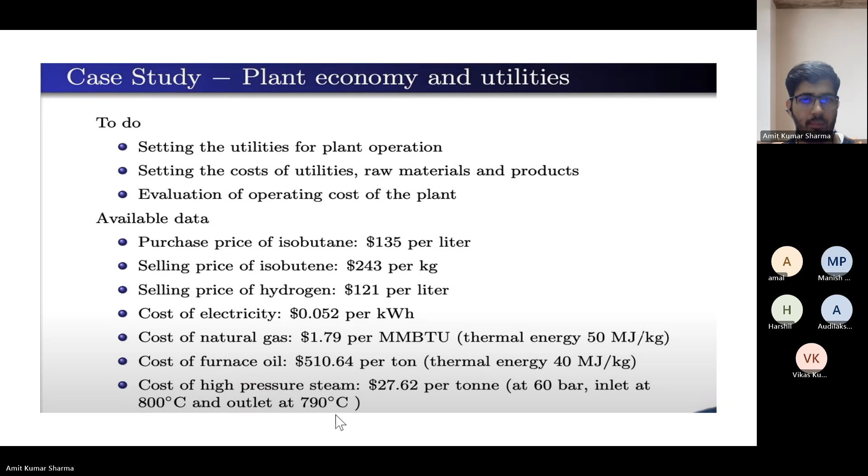So let's start with the assignment questions. Which among the following is not a standard utility item in Aspen Plus? The options are coal, electricity, steam, and wood. We have some standard utility items in Aspen that you can directly use. Which one is not standard and not available in Aspen Plus? Wood. Okay, so we have an answer: wood.

Anyone else? Coal is also not a standard utility. Okay, have you checked the Aspen software? Yeah, I'm checking. Okay, check.

Normally coal is listed. If we are making a flow sheet for a thermal power plant, then I think coal will be there. So in my opinion, I think coal should be there. Maybe the direct coal name is not mentioned, maybe in some other form, but I think coal should be there because coal is the main feedstock for a power plant.

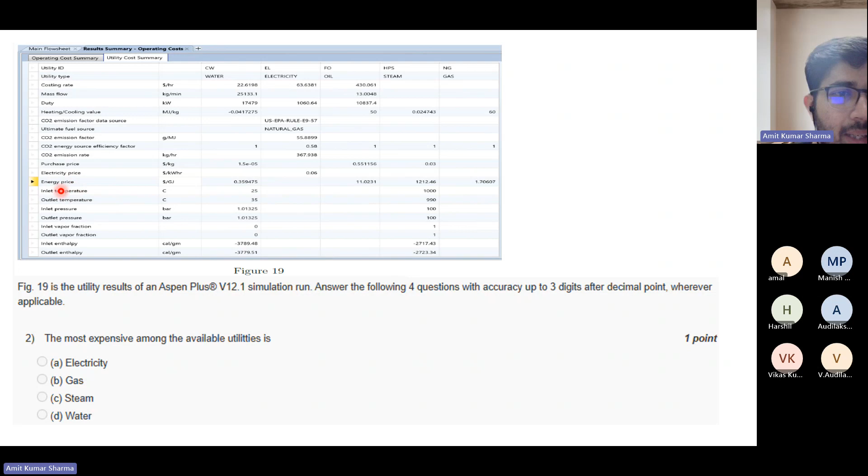So here you can see we have two prices, energy price and electricity price. The energy price for water is in dollars per gigajoule, and for electricity it's dollars per kWh. So electricity is only 0.06. This is 0.35. Oil is 11.02, steam is 1212.46, and gas is 1.76. So this is the parameter by which you can compare the expensive one or cheap one. This costing rate gives you the results for what you used in your system, and this is the amount you are spending to run your system for 1 hour—to fulfill your system's utility demand. But that's not the price for the utility; the price for the utility is these two values. So compare among these.

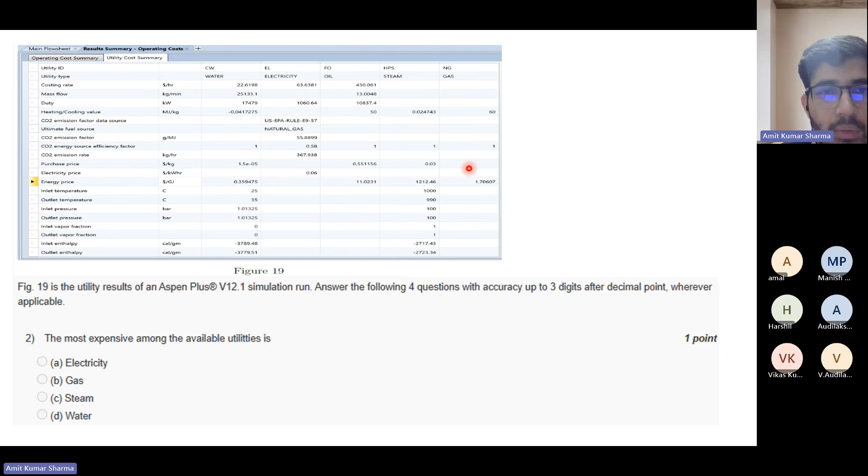So as you said, steam is the highest one, so the correct answer would be steam. Yes, steam. Is it clear?

Okay, if you have any doubt, let me know.

So which among the following utilities has not been used in the simulation? Electricity, oil, steam, and water. Electricity. The question is which among the following utilities has not been used in the simulation? So we have one answer, electricity. Anybody else?

Again, you need to check the parameter by which you can compare, and I think in the previous question we discussed about it. Try to correlate.

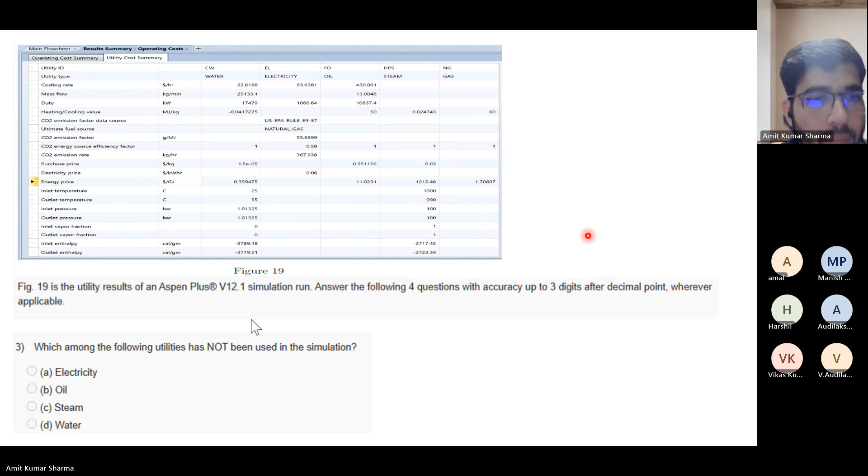Sir, steam or gas? Yes. So steam or gas is not used because, like as we discussed, so

this costing rate is representing the amount you spend for 1 hour run of your system. So you can see only we have three data. We have data for water, electricity, and oil. So basically, in our simulation, we have only used these three utilities. There is no data for steam and gas.

So these two have not been used. So check the options. Electricity is there, so electricity we have used, so option A is wrong. Then oil, we have data for oil also the costing rate, so it is also used. Then steam, yeah, we don't have any data for this, so it means that steam has not been used. Then water, so yes, water is also used.

So only option A, B, C, and D. Only option C, steam, has not been used in the simulation. And the gas also has not been used, but it is not in the option. So the option is

See, C, steam. Sir, we can also find the answer by looking at duty, right? Yeah, you can also check with the duty. You can also check with the mass flow.

So basically, these data, because if you don't have any mass flow, it means because mass flow, for electricity, there will be no mass flow, but the heat duty, it will be there. So heat duty is also an indicator, and the costing rate is also an indicator. And the other indicator, I think, only these two are the common indicator that will be there. Because if you are using any utility, then there will be some costing.

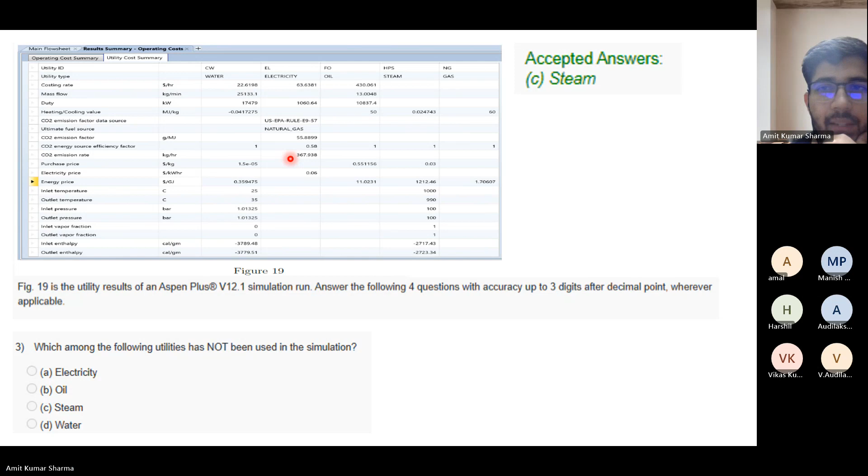The next question is, the utility water is released at what degree centigrade? 35. So we have an answer, 35. Yes, 35. Yes, so it's direct.

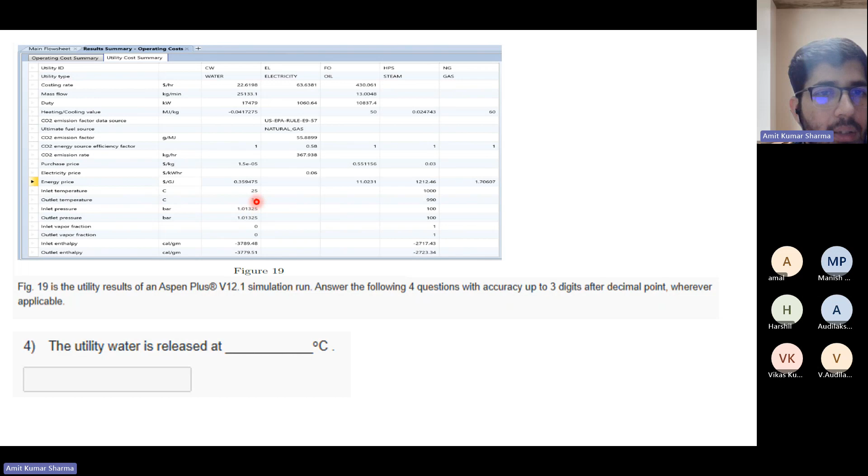Okay, so you can see the outlet temperature. The inlet and the outlet temperature you can see here, it's 25 and 35. So released means the outlet temperature. So the outlet temperature is 35. The answer is 35.

Now, the cost of utility water is - so what is the utility cost for water? 0.5 into 10 to the power minus 5, how much is it? 22.6, 22.62 dollars. We have one answer, $22.6 per hour, and I think there was another answer regarding 1.5 into 10 to the power minus 5, 0.5 into 10 to the power minus 5. Okay, what is your reasoning behind this answer?

Cost of utility water is... your voice is not clear, so please try to speak louder. Yes, sir, I'm confused between this because it is 1.5 into 10 to the power minus 5, which is the purchase price, and 22.6 is the cost incurred by us while using it in simulation.

Okay, so if you have a confusion, you should check the unit that the question asked. Then I think your confusion will be clear. So just check the unit. So they have asked in dollar per hour. Okay, sir, okay, got it.

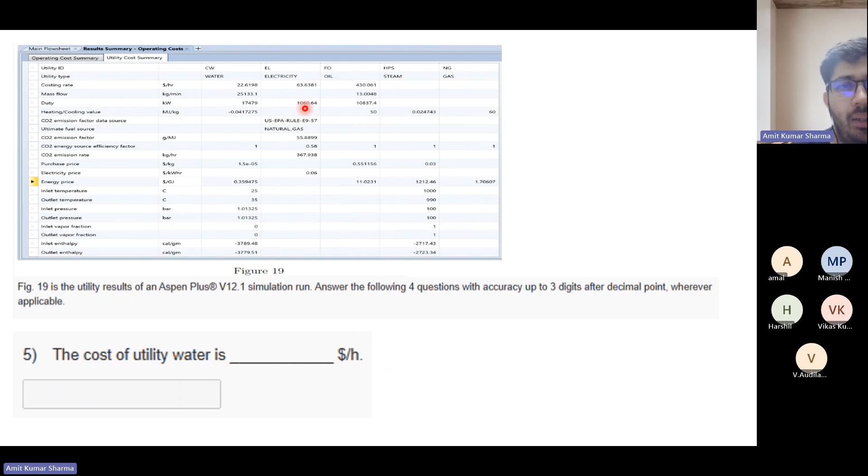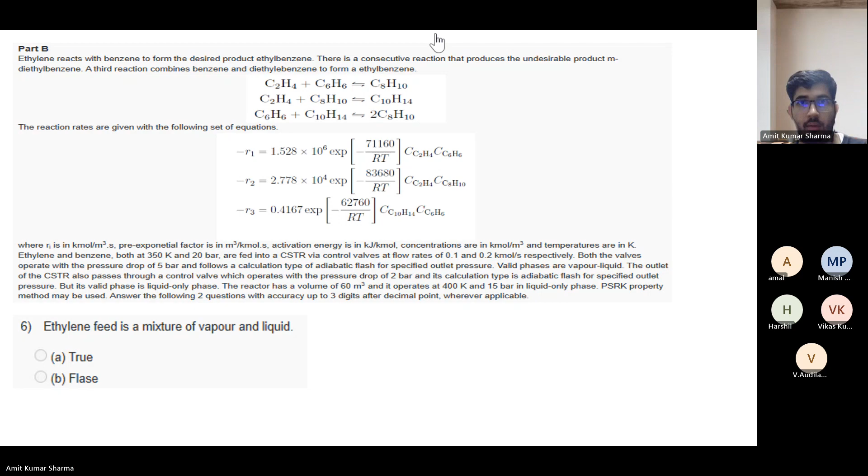The answer is false. Okay, so we have one answer, false. So let's start. Let me share my screen so we can solve it and check the answer.

So open your Aspen, then open a new simulation. Then here you define the component. So first the component, benzene, I think. Then we have ethylene. Then we have ethylbenzene.

Ethylbenzene you will not find directly, so you need to use the find command. Click on find and type the name here. It is ethylbenzene. So type the name, click find now. I think I did some spelling mistake.

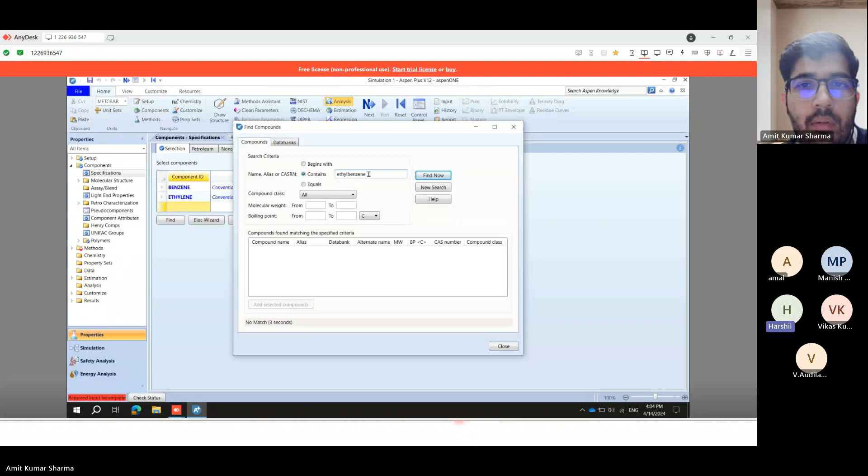So it's ETHYLENE, ethylene benzene... so ETHYL, only ethyl benzene. If you just put the chemical formula in the component ID, then also it will work - we can also do that, but I want to show you by typing the name. So the name is ethyl benzene, not ethylene benzene. So search for ethyl benzene, you will find some compounds here with their formula.

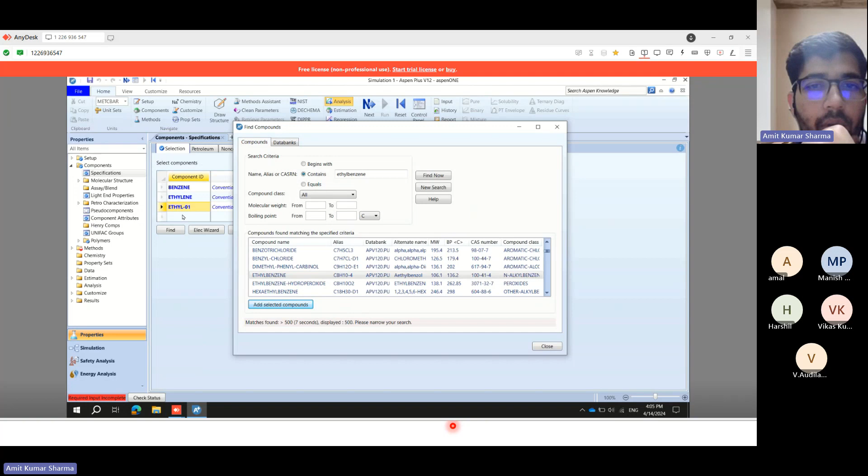So here you can see the ethyl benzene, it's C8H10. Click on add selected compound, so you can see it here. Or you can also type the formula C8H10, then you can also find it.

Then the second one is M-diethyl benzene. So the formula for this is C10H14. Okay, so now let's try with the formula C10H14.

So you can see you have something C10H14. So now find M. So yes, M-diethyl benzene. Okay, so it's C10H14.

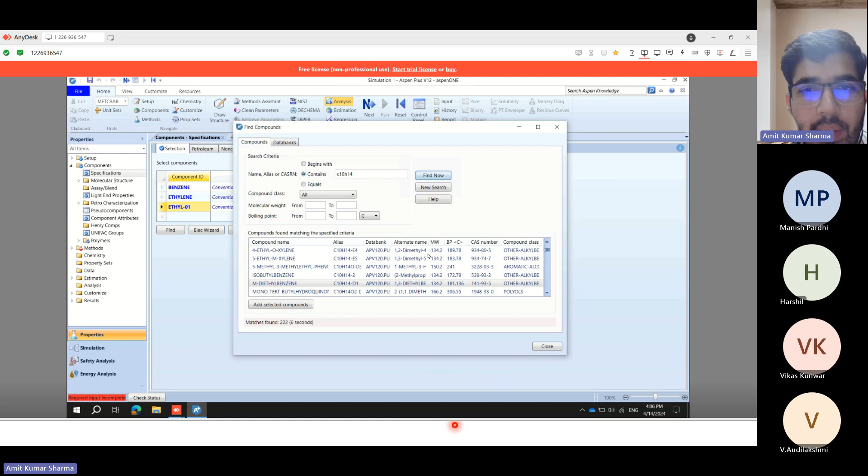So click on add. Then if you click on replace, your previous added will be replaced, but we want this one also, so click on add. So you can see it is added here. Now we have all four components. Now click on next.

Now here we define the method. So in the question, the PSRK property method may be used, so you need to define the property method as PSRK. Find the method, okay, so it should be PSRK. So here it is. Predictive Redlich-Kwong-Soave equation of state, PSRK. Then click next and run the property simulation. Okay, so it's done.

So the results are available. Now go to simulation environment. So here, if you read it, you can see the ethylene and benzene both at 350 Kelvin and 20 bar are fed into a CSTR via control valves at flow rates of 0.1 and 0.2.

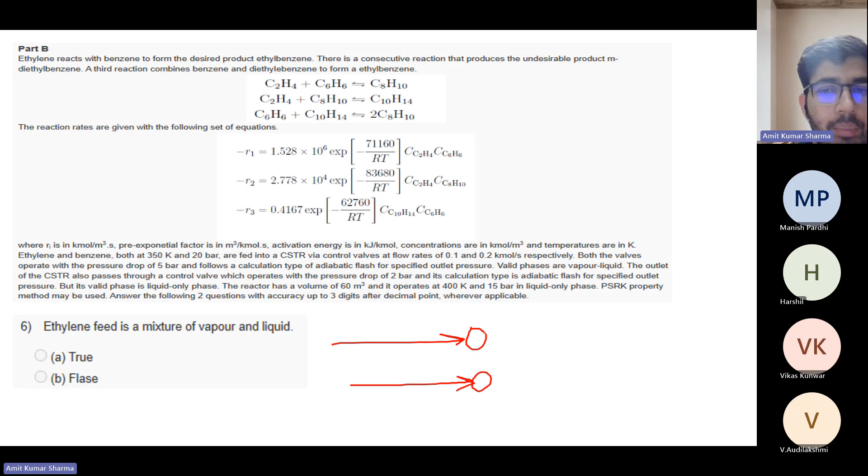So basically it means that there is one stream of ethylene and one stream of benzene. Then there will be a valve, okay, and from these valves you can control the flow, and these two are going into a CSTR reactor.

So first, because the question is ethylene feed is a mixture of vapor and liquid, if we only design up to here, I think we can check the stream results at this pressure and temperature. So do this.

So we have valves here, B1 and B2, okay, so we have two valves. Now connect the streams.

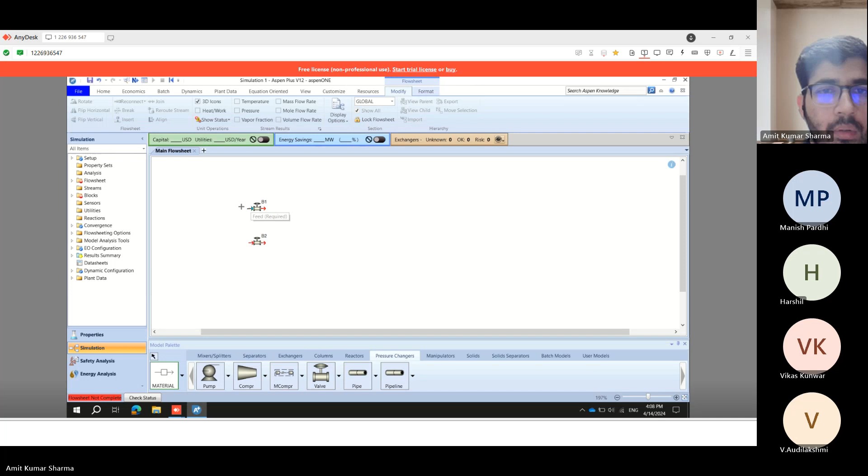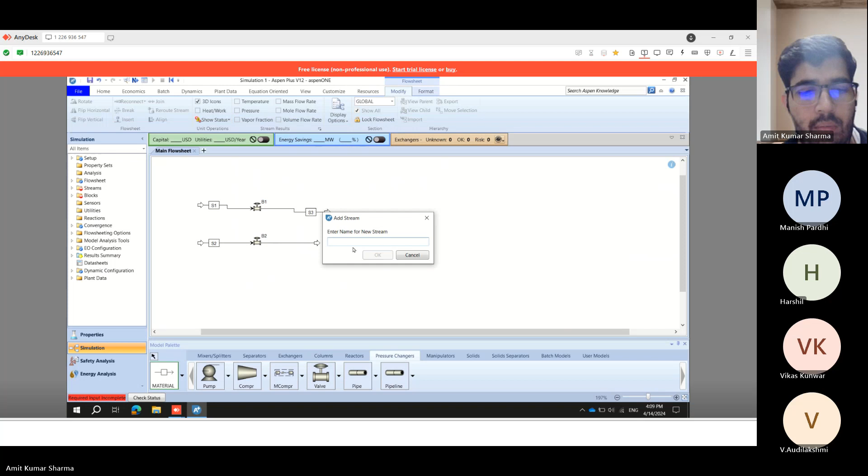So let's say stream S1, S2. Okay, so you've connected these. So click next. Now it's asking for the S1, so first stream is which one? What is the temperature?

77 degrees Celsius, what is the temperature for stream S1? Suppose the stream is benzene. 77 degrees Celsius. Your sound is not clear. Okay, so the 77 degree temperature. Your voice is very low, please check your mic. So you can see the temperature and pressure here.

Okay, so both ethylene and benzene are at 350 Kelvin and 20 bar. You can also enter in degree or you can also enter in Kelvin. So let's enter in Kelvin, 350 Kelvin and 20 bar.

So what is the flow rate? Flow rate is given here, like suppose first I am considering the ethylene, then the flow rate is 0.1 kilomole per second, so enter 0.1. Okay, so whenever you enter the flow rate, change the basis, like it's a molar flow rate, change it to mole, select the appropriate unit, then select here fraction. Mole fraction. So first we are selecting the ethylene, so the mole fraction of ethylene is 1.

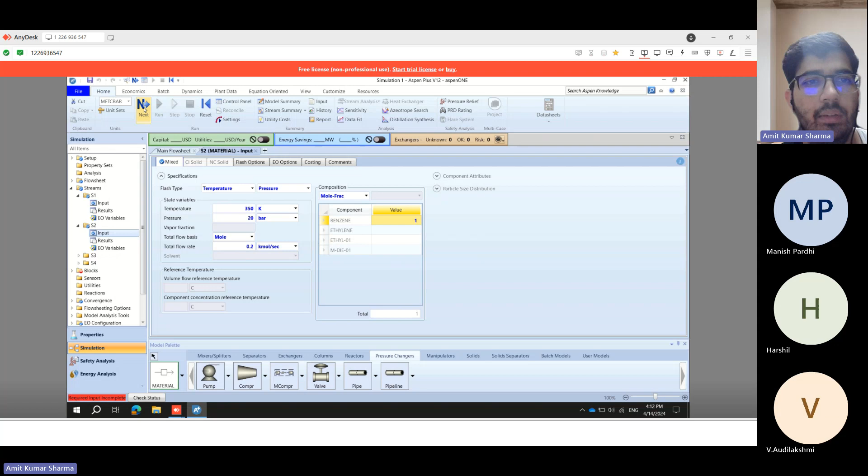Both are defined, click next. Now the valve B1 and B2, so valve for benzene and ethylene. So we have given that both the valves operate with a pressure drop of 5 bar, follows a calculation type of adiabatic flash for specified outlet pressure.

And the valid phases are vapor and liquid, so you've given some conditions, give this condition to the valves. Vapor liquid, okay, you've given the pressure drop, so how much is the pressure drop? 5 bar, so what should I enter here? 5, only 5, yes, so because it's directly written pressure drop, we will enter 5. Okay, so this one is defining the pressure drop.

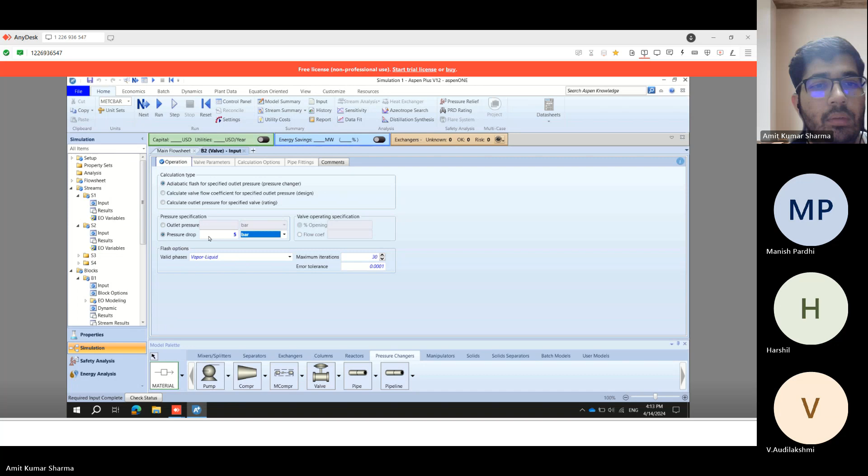And the type is adiabatic flash for specified outlet pressure, okay, it is given in the question. So select these three, you can see the inputs are okay, it's blue, and click next. Again for the second valve, same pressure drop. Okay, click next, so all required input is complete.

So now we can run the simulation, click OK. So we have results, now go to the stream results.

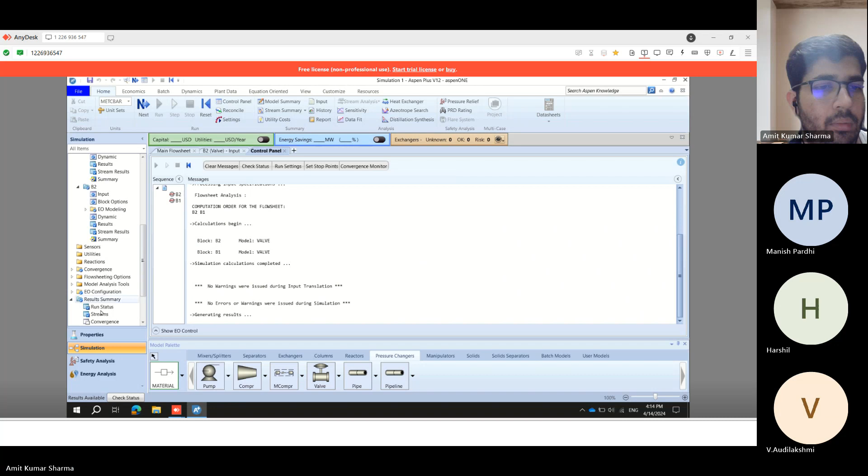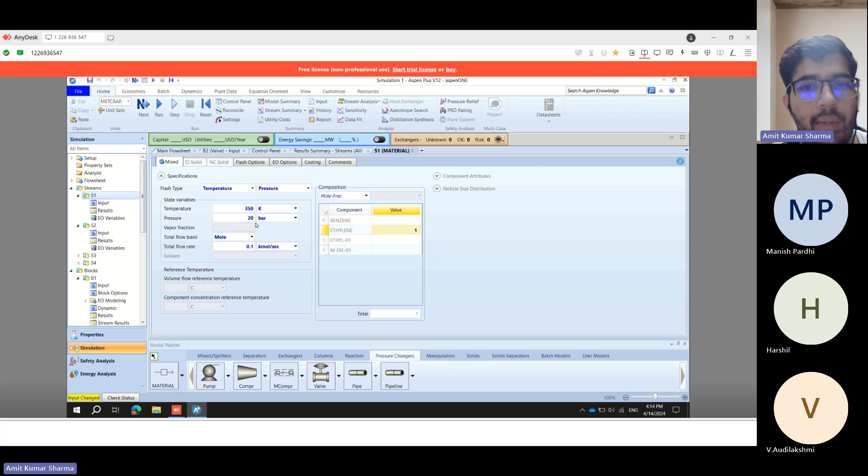So here we have streams S1, S2, S3, and S4. S1 is the benzene... sorry, let me check which one is S1. So S1 is this one, the ethylene, and S2 is the benzene.

So here you can check the phase. S1 is vapor phase and S2 is liquid phase. So ethylene is in vapor phase and benzene is in liquid phase.

So the question is about ethylene. The statement says ethylene feed is a mixture of vapor and liquid. But from Aspen, we can see the ethylene stream S1 is only in vapor phase. So the given statement is false. The correct answer is false. Any doubt?

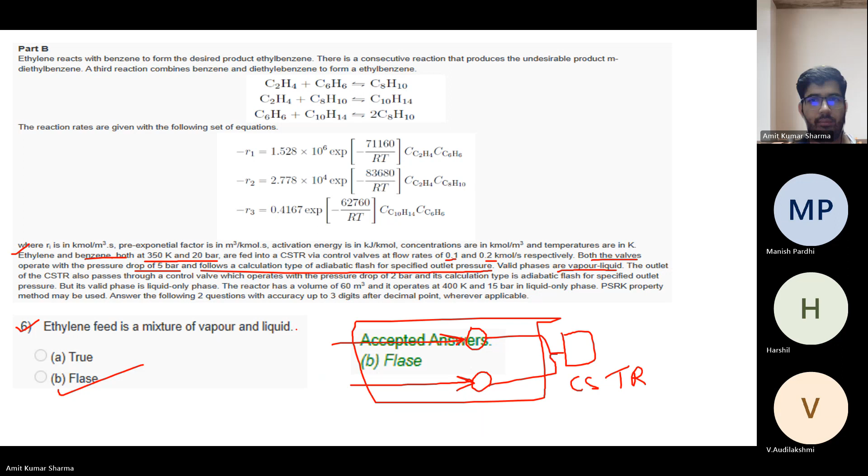Now the temperature of the reactor outlet is the next question. So now just add the CSTR reactor, define the reaction kinetics, and let me know the temperature of the reactor outlet in degrees centigrade.

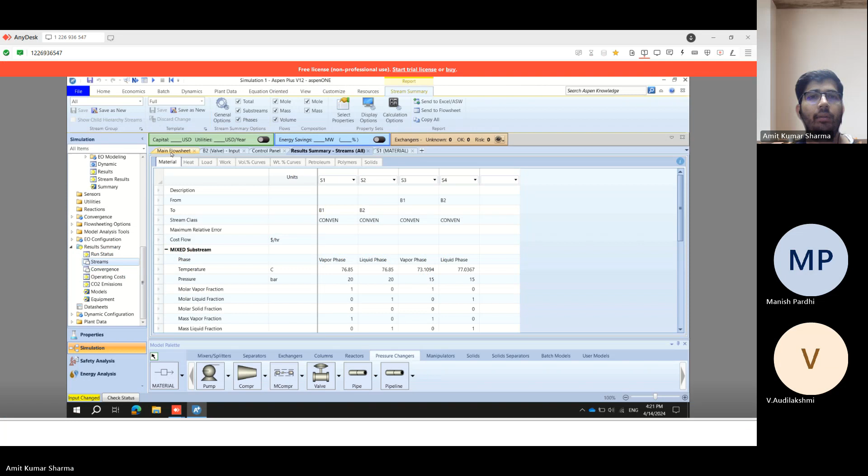Okay, so we can do this. Just go to the main flow sheet. Then we need to add a CSTR. So go to the reactors, you can find the CSTR, click on it. So we have added a CSTR. Now we need to connect these two streams to the inlet to the CSTR.

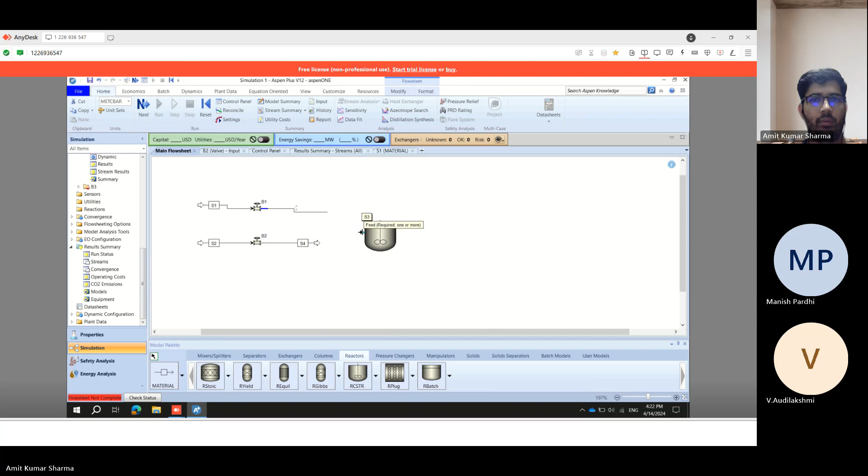So right click, then reconnect the destination. So it's here. Then for this one also, right click, then reconnect the destination. So it's here. So we have connected both streams.

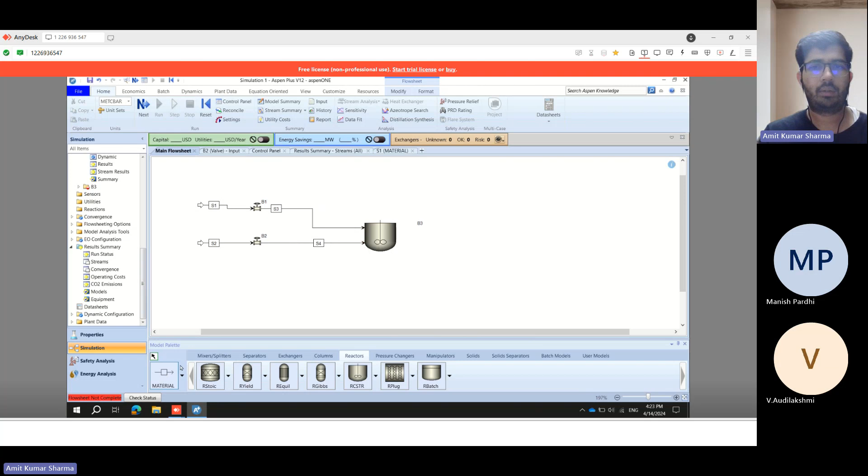Then there is the outlet stream, let's say it's stream S5. Now click on next. So click on next, then it will ask you about the CSTR input. So we have given some data for CSTR.

So the outlet of the CSTR also passes through a control valve, okay, which operates with a pressure drop of 2 bar, but it's liquid only phase. The reactor has a volume of 60 meter cube, operates at 400 Kelvin and 15 bar in liquid only phase. So we have given the pressure, how much? It's 15 bar and 400 Kelvin temperature.

So 15 bar is the pressure, 400 Kelvin is the temperature. The valid phase is liquid only phase, so change it to liquid only. Then the volume, it's 60 meter cube, so it's 60 cubic meter.

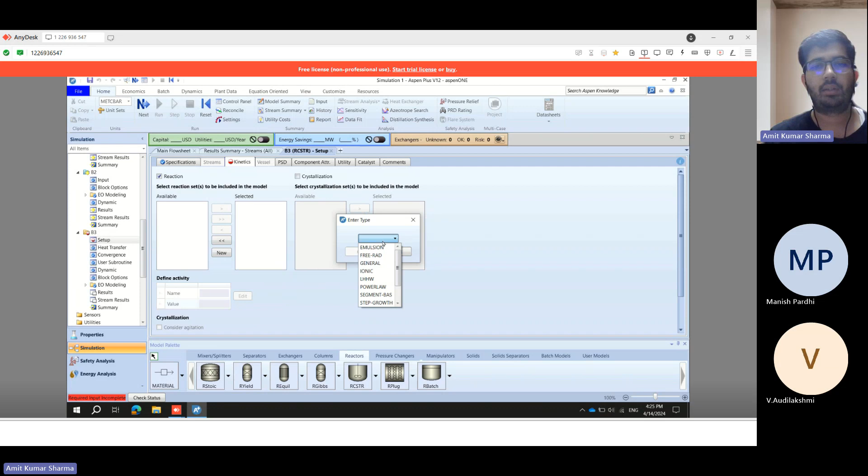Now we need to add the kinetics. So for kinetics, we need to add the reactions. Define a reaction R1, it is of type kinetic power law reactions. Click OK. Then we need to go to the reactions, then R1. Then here we need to define the reaction.

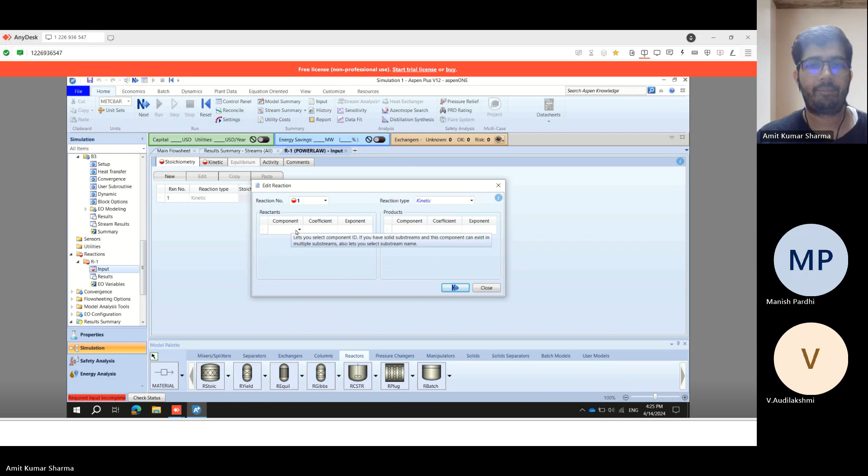So the first reaction is ethylene reacts with benzene. Ethylene, benzene, coefficient 1, 1. Then they are making ethyl benzene.

Then we need to add another reaction. So the second reaction is ethylene reacts with ethyl benzene, and they are making diethyl benzene. So ethylene is reacting with the ethyl benzene, and they are making diethyl benzene.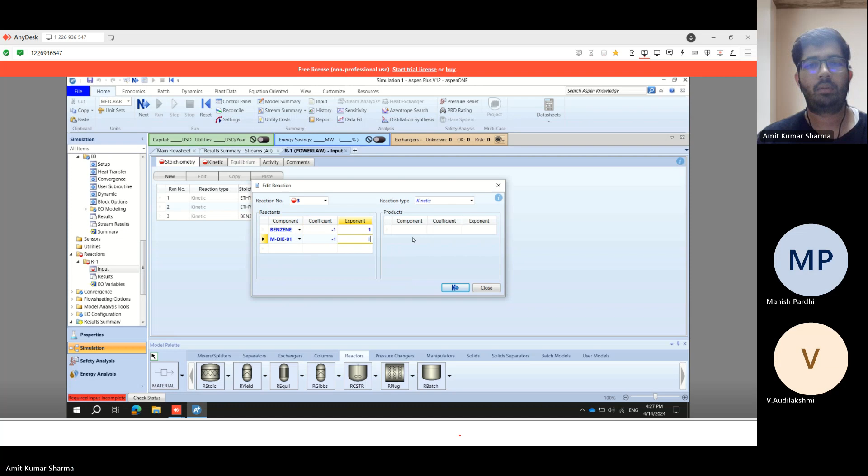Now the third reaction is benzene reacting with diethyl benzene, and they are making ethyl benzene, C8H10.

So we have defined the reactions. Now the kinetics. So you can see the equation here. We have not given any T0, there is no T0. The equation is like this.

If T0 is not specified, the kinetic factor is K T to the power n, E raised to the power minus E by RT. So compare these, the value of K will be this constant. The value of K for reaction 1 is 1.528 times 10 to the power 6.

Okay it's plus 6, plus, yeah thank you. And the n is 0 because you can see there is no T terms here, direct exponential. And the value of E, you can see we have given the unit here. The activation energy is in kilojoule per kilomole, so it is 71160. The negative sign is already here, so don't include the negative sign. So kilojoule per kilomole, it's 71160, right? Yes. So it's defined for reaction 1.

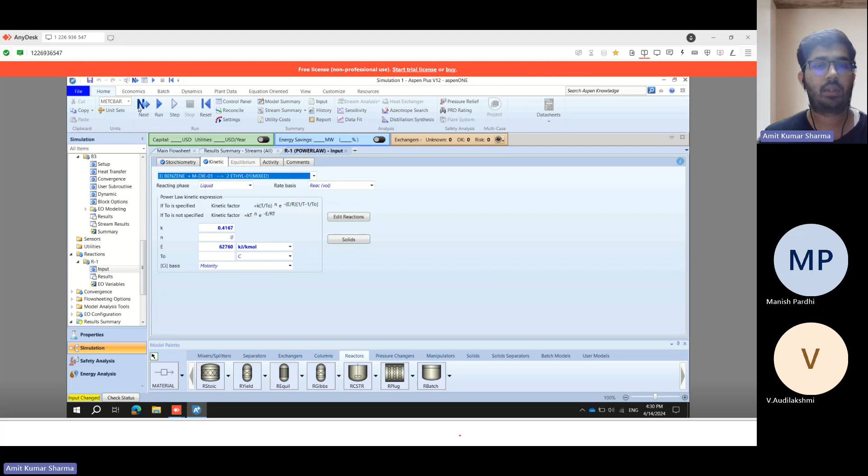So we have defined the reactions, you can see it's done. We don't need to define anything else. So just click next, run the simulation. So results are available, go to the result summary.

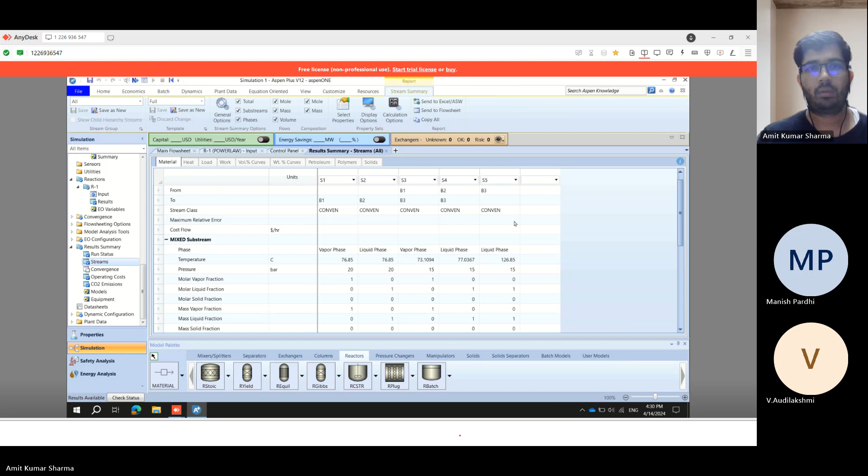Okay, so we need to find the temperature of the reactor outlet. If we check our flow sheet, the reactor outlet is connected to stream S5. The temperature of S5 will be the temperature of the reactor outlet.

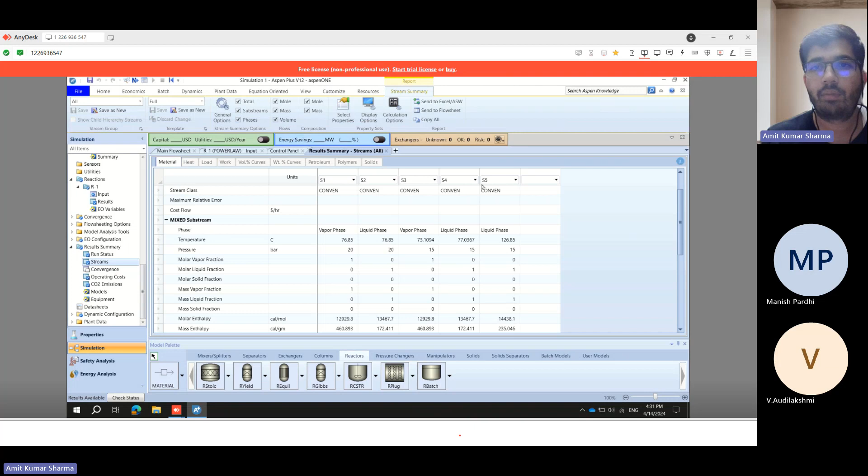Stream result, the temperature of S5 is, you can see here, 126.85. And in the liquid phase, this is the temperature. So the answer should be 126.85. Is everyone getting the same answer?

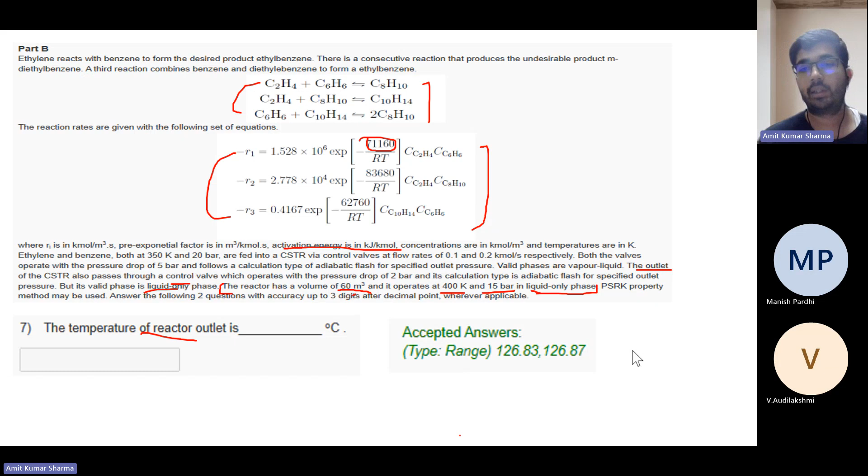Yes. Okay, nice. So let's see the answer. The answer is 126.83 to 126.87. So our answer is correct.

Okay, let's move. Is there any doubt? No, sir. Okay.

Now we need to convert the simulation into pressure-driven dynamic mode. Choose a vertical CSTR of length 10 meters with a flat head. It operates on constant heat duty. The initial liquid volume fraction is 0.864. It models equipment heat capacity with mass 6800 kg and specific heat capacity 500 joule per kg Kelvin. It includes a temperature controller. Save the Aspen Dynamics file and open it. Answer the following questions.

So there is one point. If you read the previous question carefully, you need to connect a control valve in the line after the CSTR. So before going to the dynamic simulation, just complete the simulation of the previous question first, then do the dynamic part.

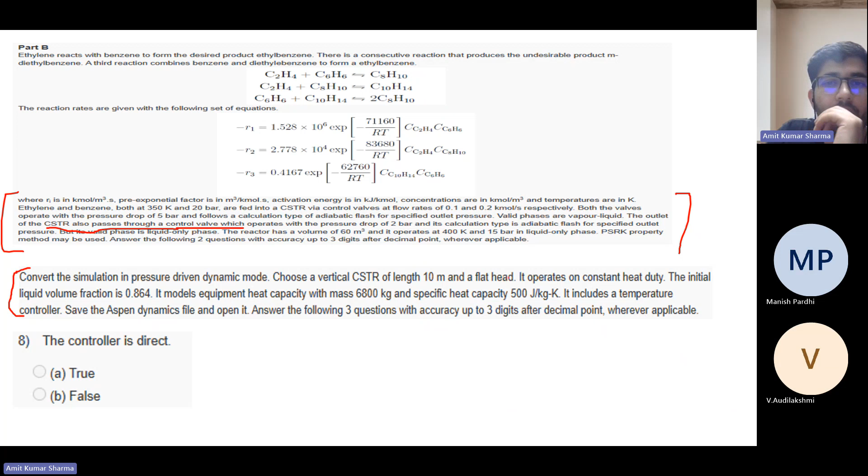Okay, so if you both are not trying, then I think we can start the solution. So first, let's complete the previous one.

So we have mentioned that the CSTR also passes through a control valve, which operates with a pressure drop of 2 bar, and its calculation type is adiabatic flash for specified outlet pressure. So just do that.

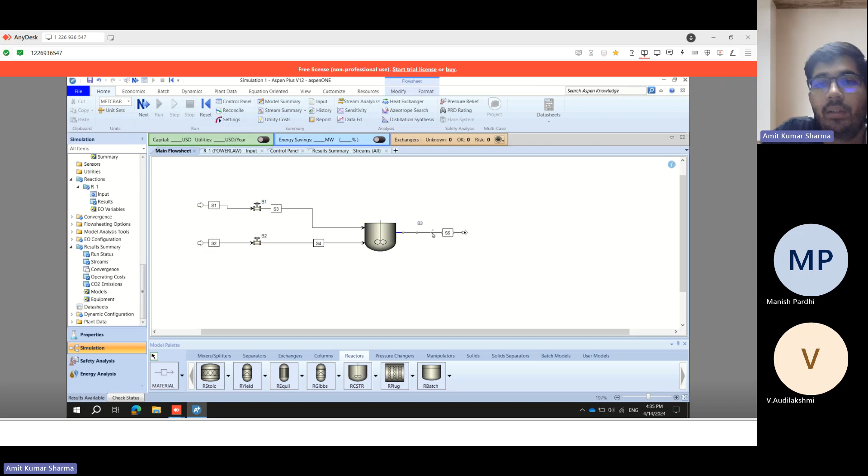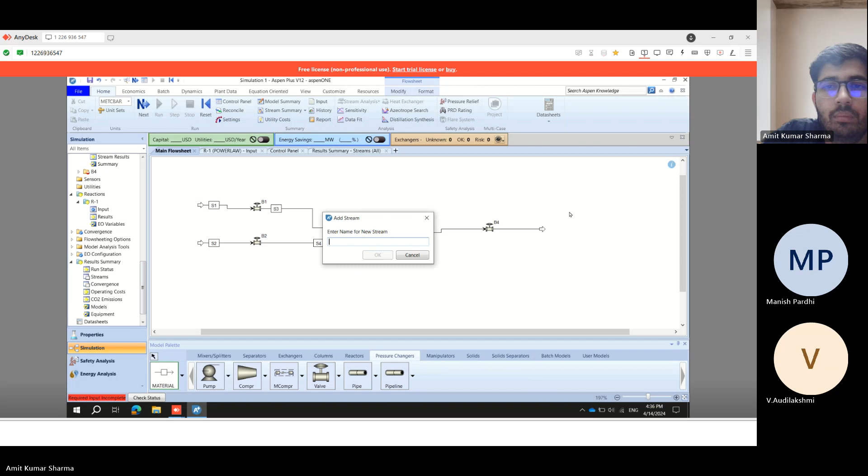So we need to connect again a control valve here. So reconnect this stream. Let's say it is stream S6. So we have connected this. Now click on next.

So it's asking for the valve B4 input. So we have given the pressure drop of 2 bar, adiabatic flash, and the valid phase is liquid only. So valid phase liquid only, pressure drop 2 bar, and adiabatic flash for specified outlet pressure. Click on next. So everything is okay. Now click OK. So your simulation is completed.

Now we need to convert it to dynamic mode. For more info regarding this dynamic mode, you should refer to the class notes and class video, where the professor briefly discussed Aspen Dynamics. It's a totally different software, a part of Aspen. So like we are working with Aspen Plus, but it's separate. Aspen Dynamics is a different part of Aspen, with so many features, so you need to understand it thoroughly and may need separate classes. Here we just discuss it very briefly, so you can refer the class notes, and if you are more interested, you can take another course for Aspen Dynamics.

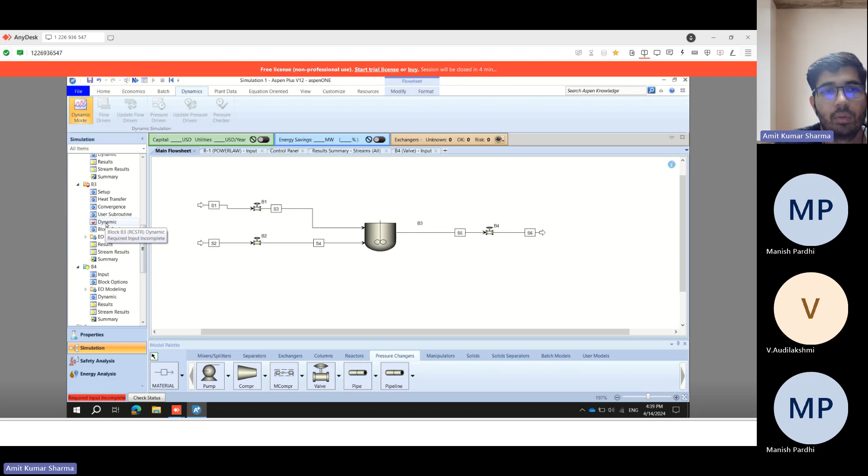So if you see here, this block is asking for some dynamic input. There is a new option to enter the input for block B3 in dynamic mode. Click on this, and it will ask for some input. So you need to fill these inputs. We have given: choose a vertical CSTR, length 10 meters, flat head.

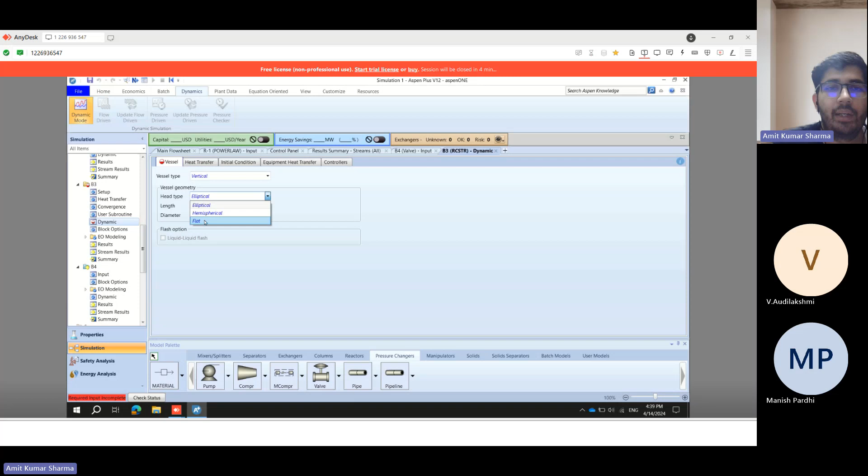So vertical type, head type is flat head, length 10 meter. Then it operates at constant heat duty. So the heat transfer is constant heat duty.

Then we have given the initial condition, the initial condition liquid volume fraction 0.864. So enter this 0.864.

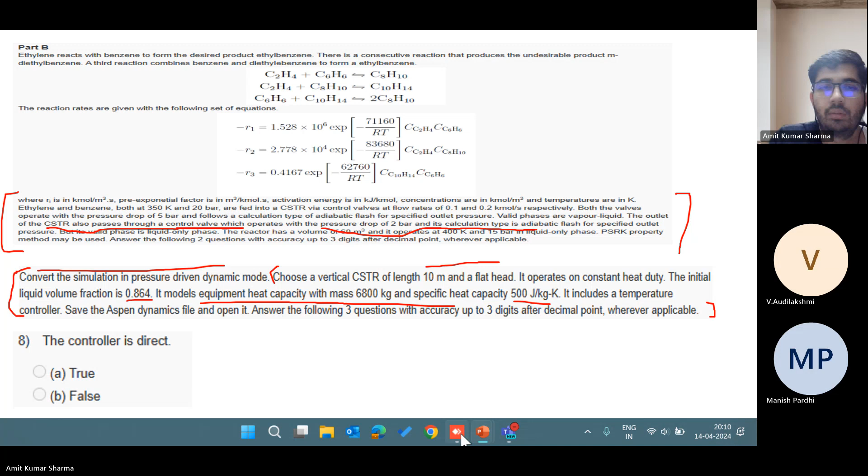Then we have given it models equipment heat capacity with mass specific heat capacity. So mass is 6800 kg. So model equipment heat capacity, the mass is 6800 kg. You've given the heat capacity of 500 joule per kg Kelvin. So it's joule per kg Kelvin and it's 500.

Then you have given it includes a temperature controller. So there's a temperature controller also. Click on the controller. You need to select only the temperature controller. Include temperature controller. So now we have given all the given inputs into this dynamic mode.

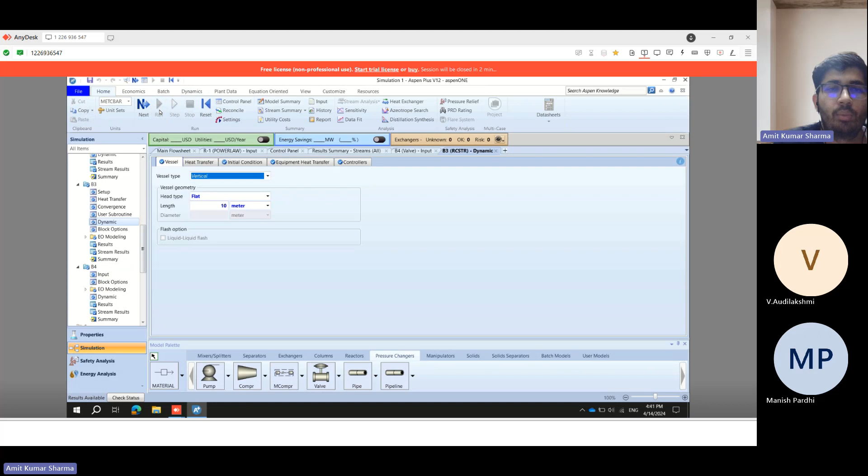So now it's ready to run. Click on run. Now simulation is complete. Simulation has run.

Now if you go to dynamics, you can see these values. You can click on it. The dynamic mode can be done by two ways, pressure driven and flow driven. It will be regarding the pressure driven, so click on the pressure driven.

So when you click on the pressure driven, it will ask you to save, the save as type. It will be an Aspen Dynamics file. As of now, we are working with Aspen Plus, so the file version is the document file APWZ. So first you should save this file.

So save as, it's a compound file, so it is APWZ. Let's say CSTR, save it. So now it's cstr.apwz file.

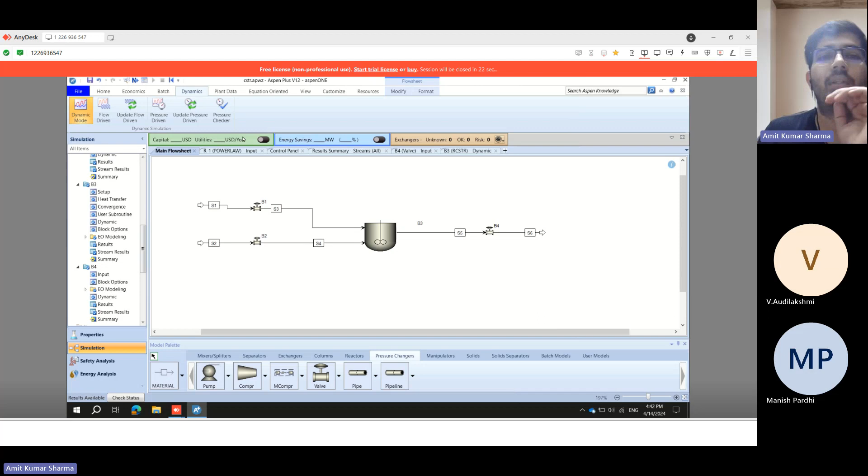When you click on the pressure driven, then it will again save in .dynf file. So rename it with dynamics. Suppose if anything happens, then you can open the previous file and start from this point. Switch to dynamics, then click on save.

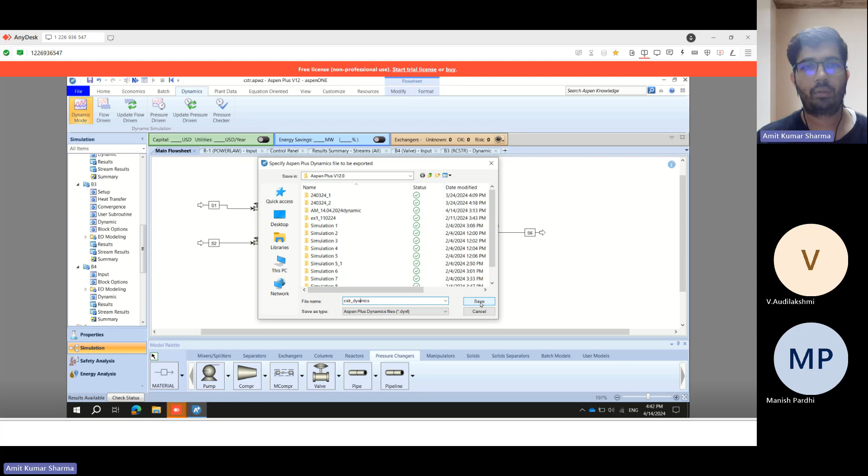Click on save button. It will give you some error. Ignore these errors and it will open a new Aspen Dynamics file.

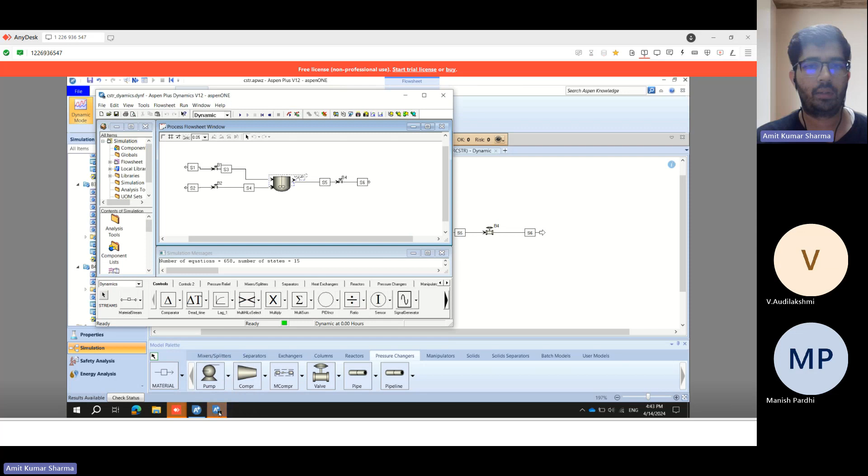You can see there is a pop-up. So close this one and open this one. This is the Aspen Dynamics. So now you are in Aspen Dynamics, no longer in Aspen Plus. This is the Aspen Dynamics software. You can explore this.

If you see carefully, this is our model, but you can see here there is another controller, B3TC. So there is some kind of temperature controller here. It is taking some input feedback and controlling the temperature of this CSTR. So it's a dynamic type of control.

You can do so many things, you can read the manual and take some YouTube help. Now what is the question? The question is: the controller is direct, true or false? So if you see here, we have a controller, this one. We need to check if it is direct or reverse.

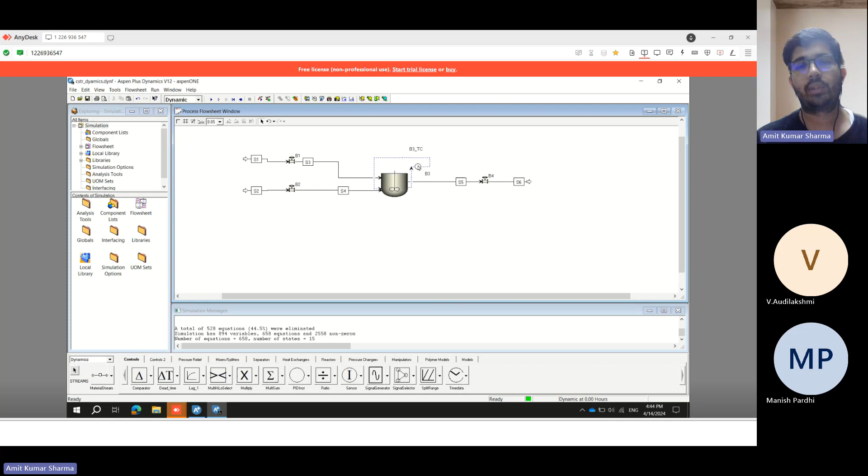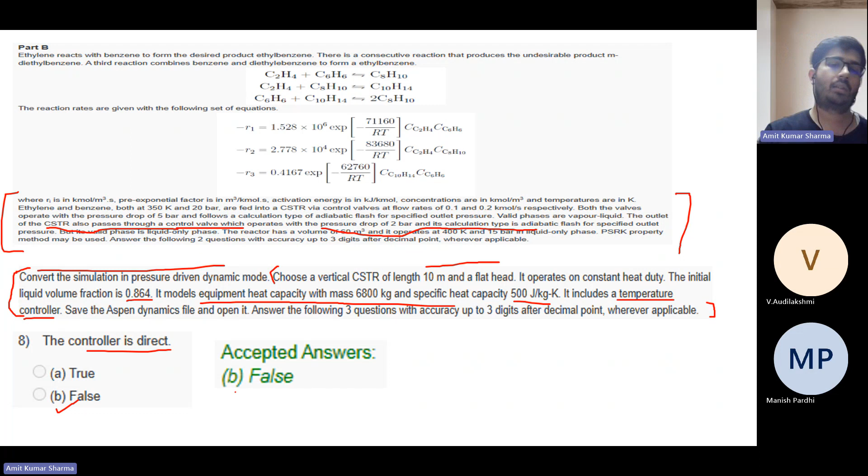If you click on it, you can see the option like set point, the process variable, and the output. If you click on configure, you can see the condition of the controller. You can see the controller action is reverse. So the controller is direct - is it? It is reverse, so it is false. The correct answer is false, the controller is reverse. For more detail regarding this Aspen Dynamics, please refer to class notes.

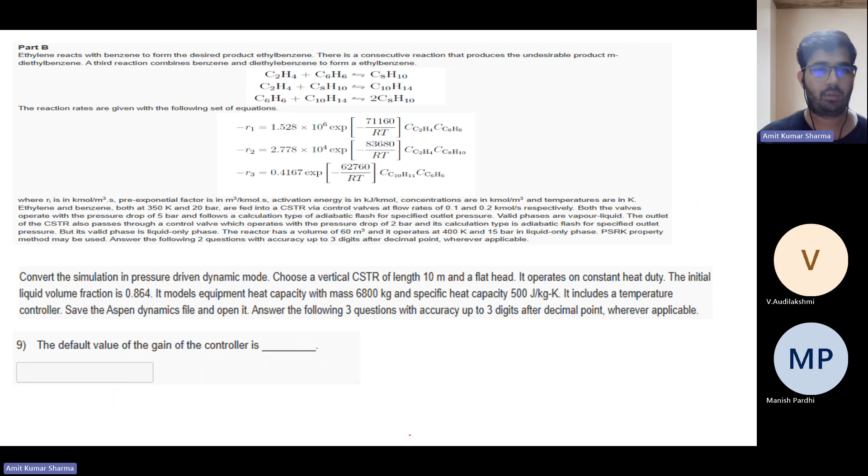Now the next question is the default value of the gain of the controller. So there is a value of gain of controller, what is the default value? If you again go to this window, you can see the gain. It is 5, so the default value is 5. The answer is 5.

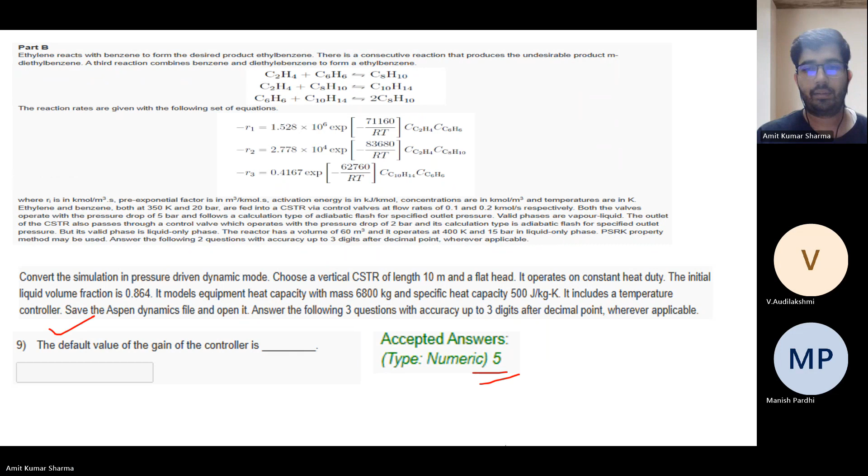So if you see the things, this is the way we can control the things. If you click on this run button, it will run some steps.

So you can see the set point is 126.85, and this variable was the varying PV. So it's trying to reach the same value, and now you can see they both are the same. After 2 hours, the steady state is achieved.

So you can see here, initially it was unsteady state. After 2 hours, you can see the steady state is achieved. So here you can change the set point and it will try to achieve this condition. Just stop it.

And suppose if I change the set point to 130, and if I run it again, so now see this one is changing. So it is changing the parameter, trying to achieve the set point of 130. So it's achieved 130.

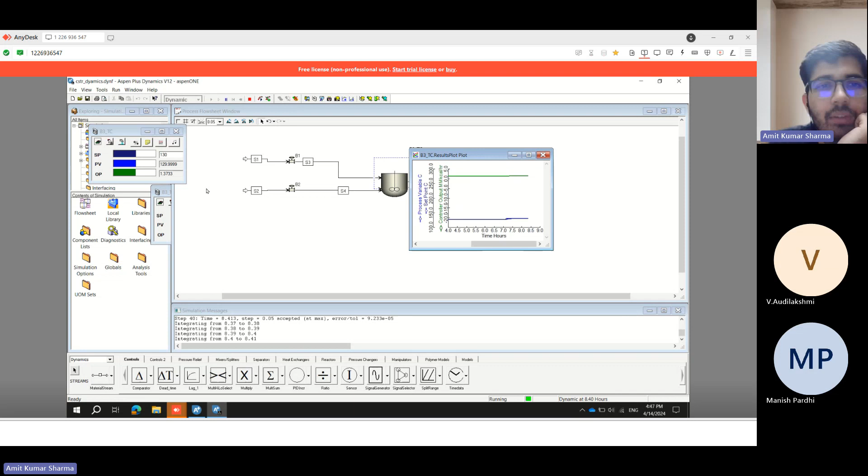So it is changing this output variable, and the unit is GJ per hour. Basically, it is changing the heat duty of the CSTR to achieve this set variable. So you can find the time, and after that there is a steady state. So this is Aspen Dynamics. You can explore more about it. Okay, let me stop it.

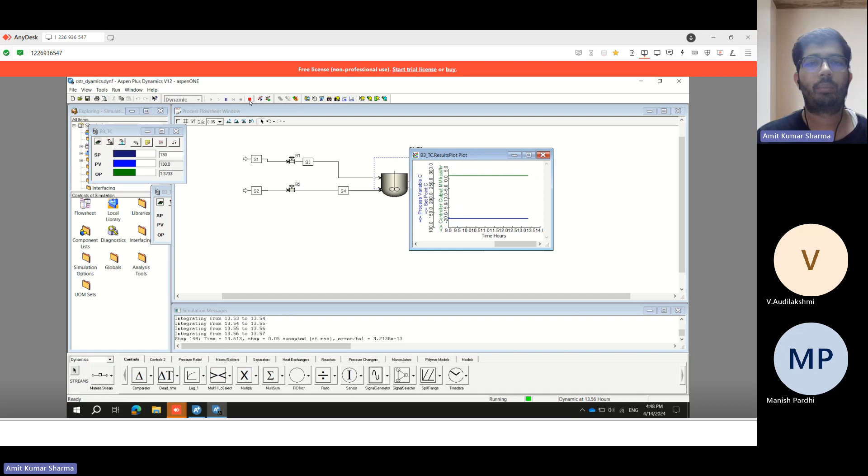So now the next question is, which among these is not an option for creating a new utility? LP steam, hot oil, methane, and cooling water. Which among these is not an option for creating a new utility?

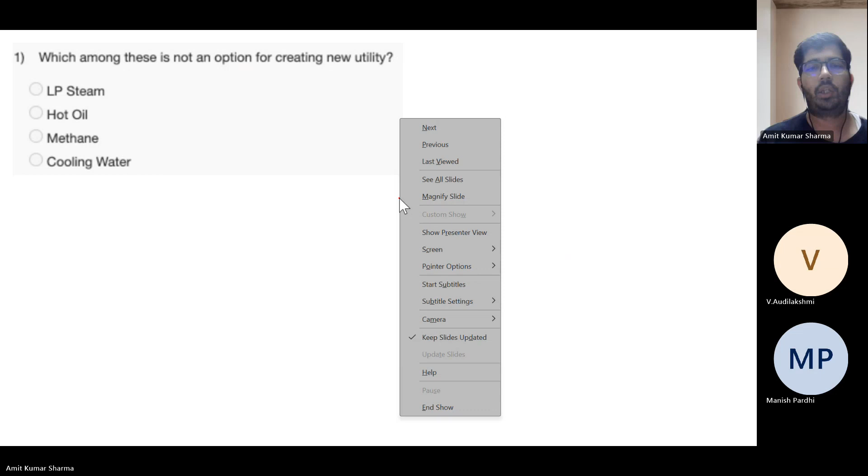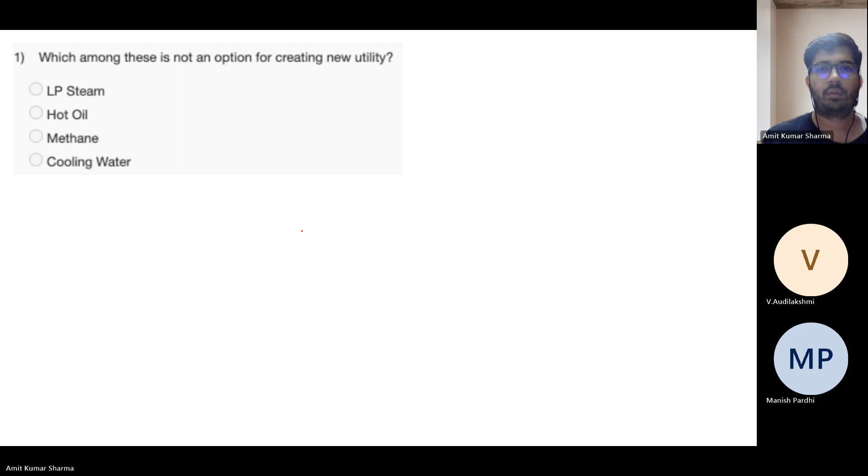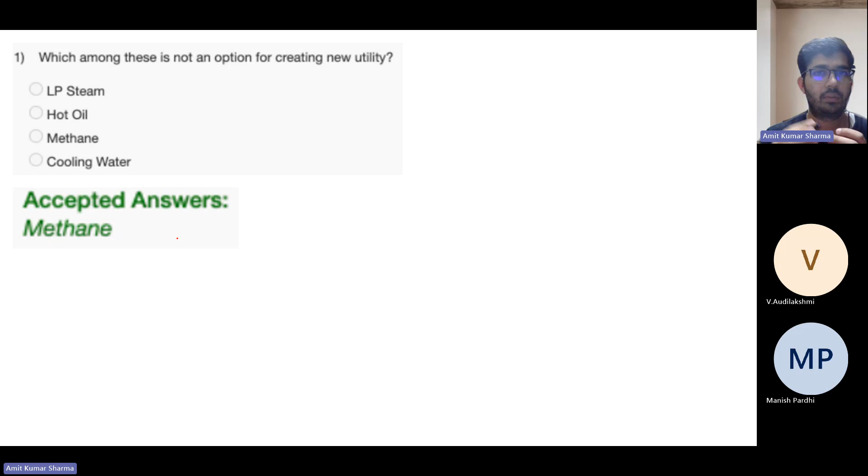Methane. Sorry, methane. Okay, we have one answer, methane. Yeah, so the answer is methane. So for a new utility, we cannot create one using methane. LP steam, hot oil, and cooling water, we can create a new utility.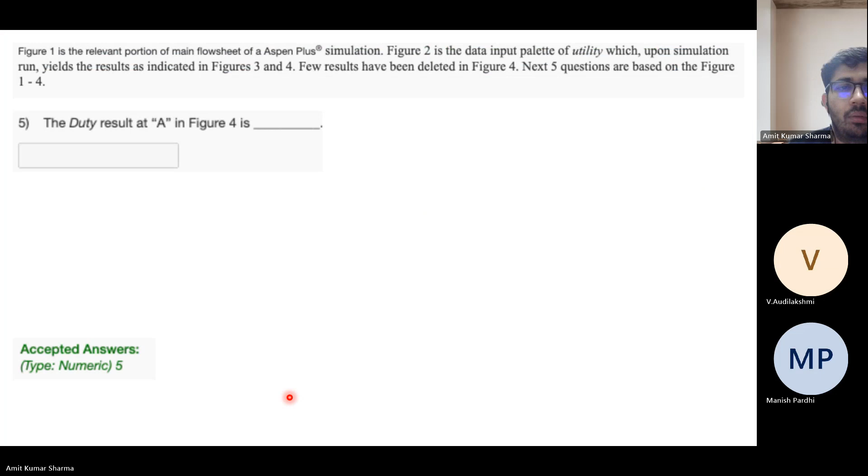Of B1. Please repeat your answer. 5 kilowatt, 5 kilowatt, B3. Okay, yeah, it seems correct, because you can see the heater result, the heat duty is 5 kilowatt. It means that we need the utility for 5 kilowatt, so the B3 heater duty is 5 kilowatt. Answer is 5 kilowatt.

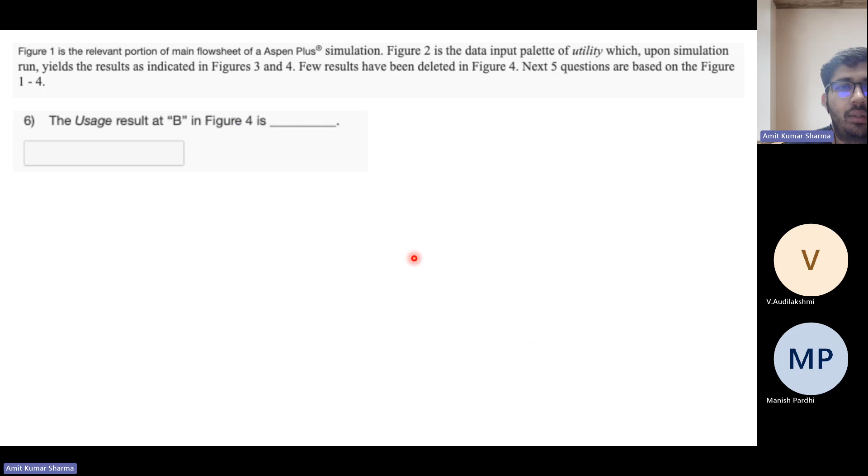The usage result at B in figure 4. The usage result at B in figure 4. So the usage, what is the value for this?

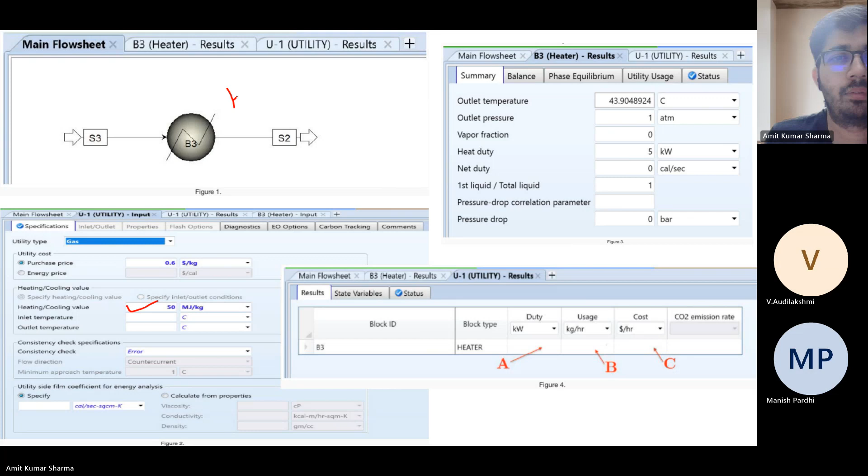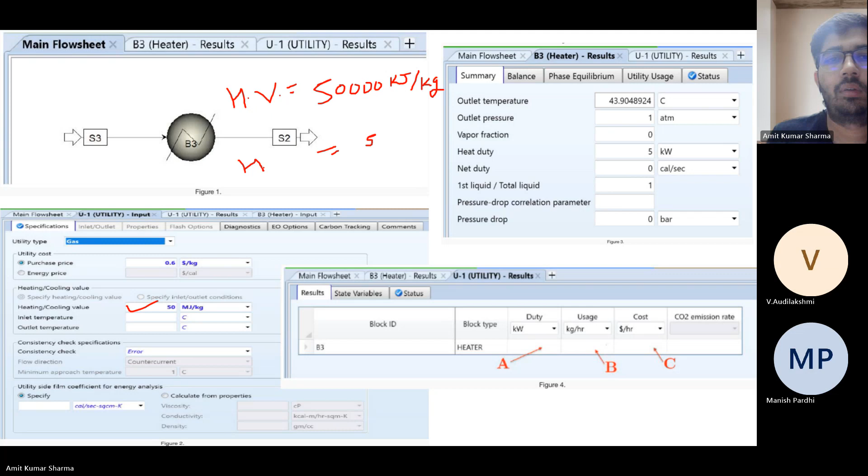So you have given the heating value 50 megajoule. Okay, so let's say heating value, so it's 50,000 kilojoule per kg. Okay. You have heat duty 5 kilowatt. So you can say heat duty is 5 kilowatts, so 5 kilojoule per second. So to maintain this 5 kilojoule per second, you need to use this gas.

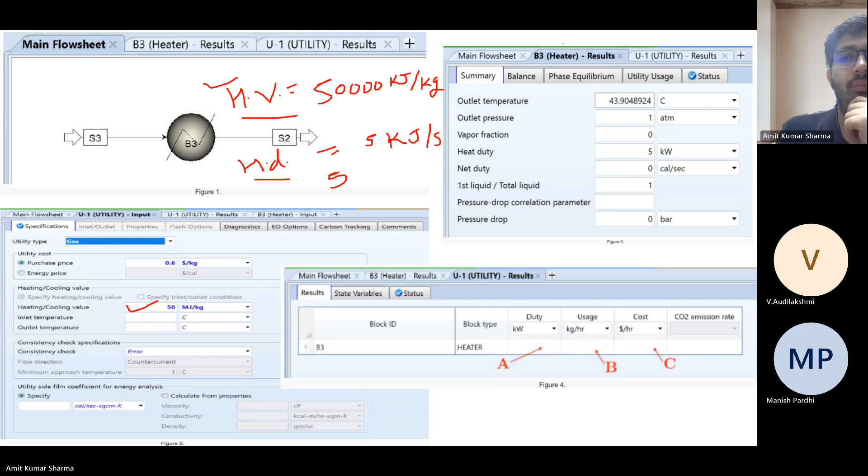So you can just divide this and you can find what should be the flow rate of this gas to maintain this heat duty. So just divide it. So 5 upon 50,000. It will give you kilojoule per second, okay, multiplied by kg per kilojoule. Okay, so this kilo will cancel out. So your answer will be in kg per second.

But we have asked kg per hour, then you need to convert the second into hour. So multiply with 3600. Okay, so 1 hour is 3600 seconds. One hour. So the second will cancel out. Okay. So it will be kg per hour. Okay.

So the answer will be, I think, how much the answer is? So it's 0.36, 0.36. Okay, so this is the way you will calculate the usage results. So basically, you have to calculate the flow of the gas required to maintain that heat duty.

Now the cost result at C. So as you are using some utility, then you need to find the cost. So what will be the cost dollar per hour for this heat duty?

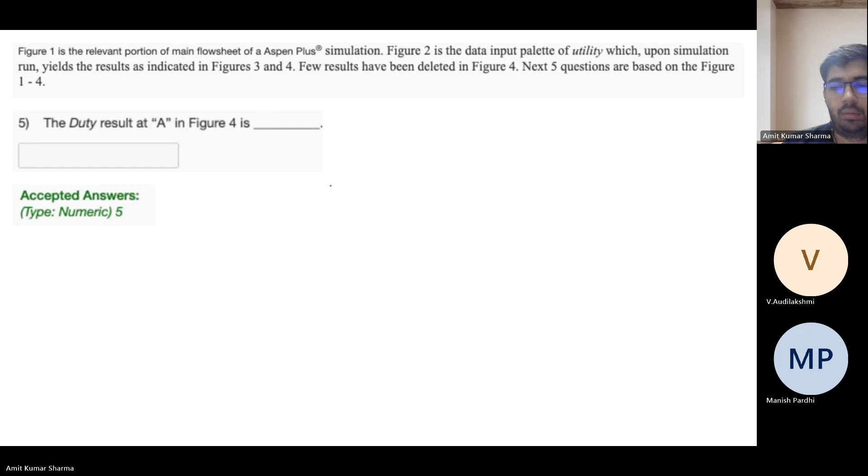The answer will be, that is 0.21. 0.21. Okay. Yeah.

Now we have another question. So we have another, now 4 figures. Figure 5, figure 6, figure 7, figure 8. So in figure 5, you have a flow sheet.

There is a heater, like from the previous question. Then there is a column. Then you can see the B4 is RadFrac column. You can see some, it's asking about duty, usage, and cost. Then you have results for this RadFrac column, and you have the reboiler stage performance. So take 2 minutes to analyze these data, and then I will go to the questions.

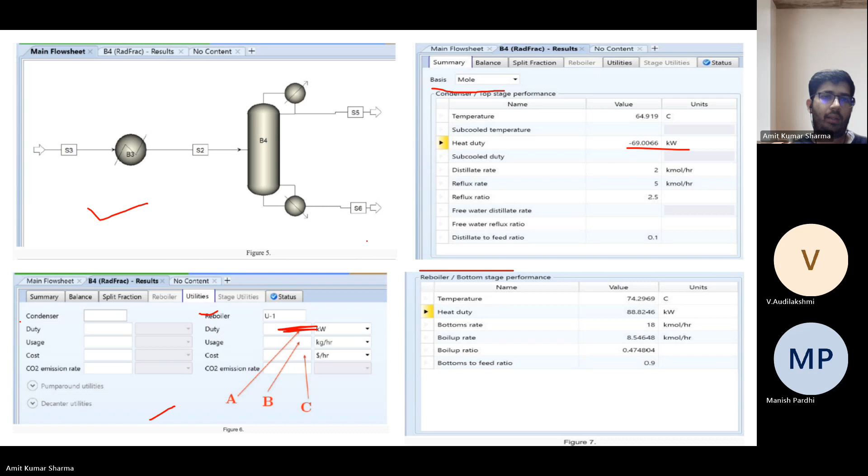If you see carefully, here it is asked about the reboiler duty. It's reboiler duty, okay. So the reboiler is the bottom stage performance and this is the condenser top stage performance. So this heat duty is for the condenser. Don't confuse this. It's very simple, you can see the duty. The trick was to see the difference between the condenser and the reboiler. That's the question basically.

In the exam also, you may have the same kind of question, so please don't make mistakes. Read the question carefully. So you have two outputs: condenser heat duty and reboiler heat duty. This one is for condenser and this one is for the reboiler. So this is the correct answer, 88.8246.

The next question is the usage result at B in figure 6. The usage result at B in figure 6.

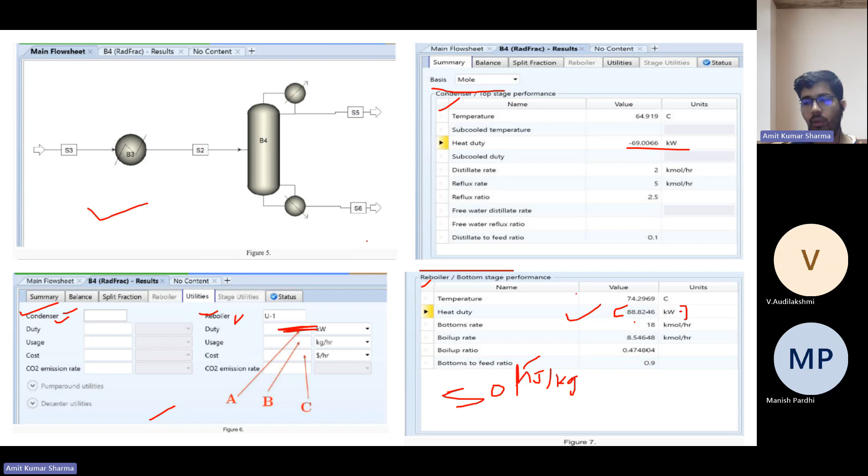So 50,000 kilojoule per kg, then it's kilojoule per second. Divide 88.8246 by 50,000. You will get 0.001776492 kg per second. But we were asked kg per hour, so convert that into hours, multiply by 3600. You will get 6.3953 kg per hour as the answer.

Okay, so that will be the usage. It's 6.39, so this is in range. Your answer is correct. Now the cost result at C.

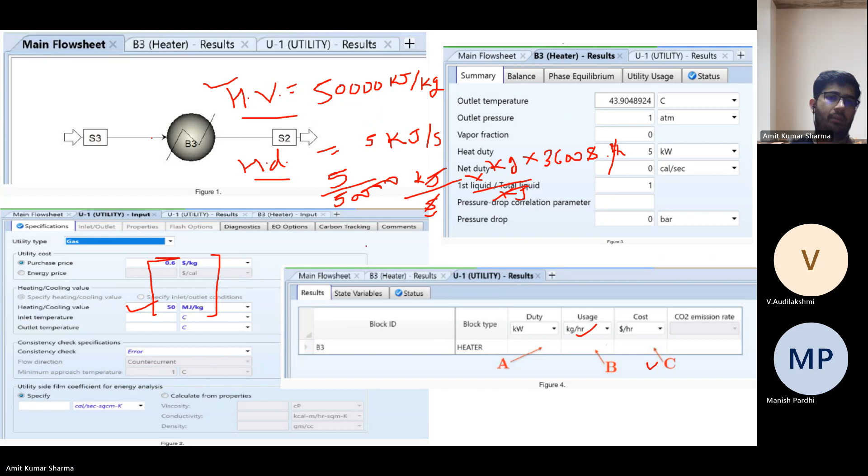So what is the cost? Now you have the flow rate, you have the price. For the previous question, the price was 0.6 dollar per kg. Now let's find the price in dollar per hour.

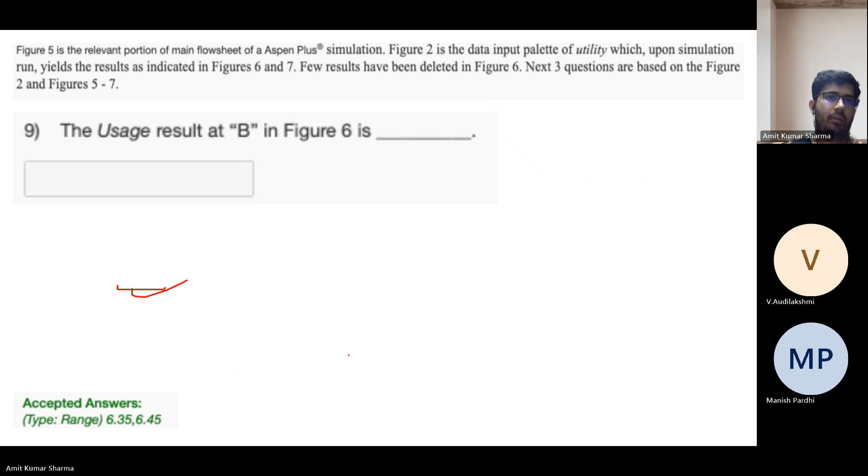3.837. Just multiply 6.39 with 0.6, and we'll get $3.837 per hour. So yes, the answer is this. Okay, nice.